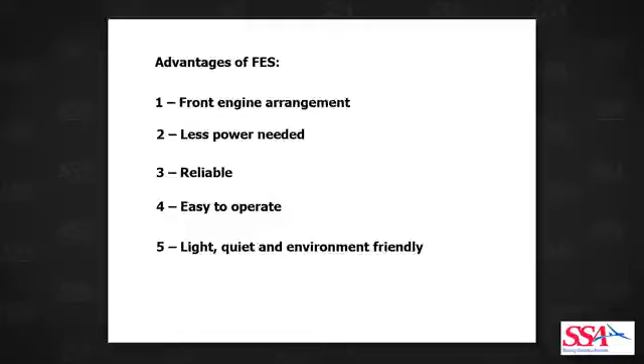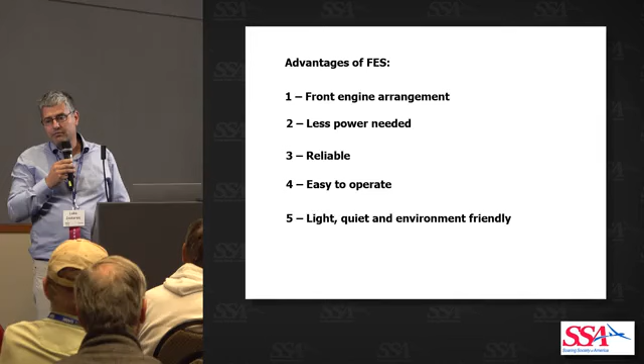Why did I do the FES development? From the beginning, I was always a pure glider pilot. I did not really want to have an engine on competitions because it was my feeling that it's not really an advantage. But with some time, when I got married and had my first daughter - before that my girlfriend, then my wife - she was not so eager to pick me up on the field, so she said figure out something, and eventually I did this front electric sustainer system.

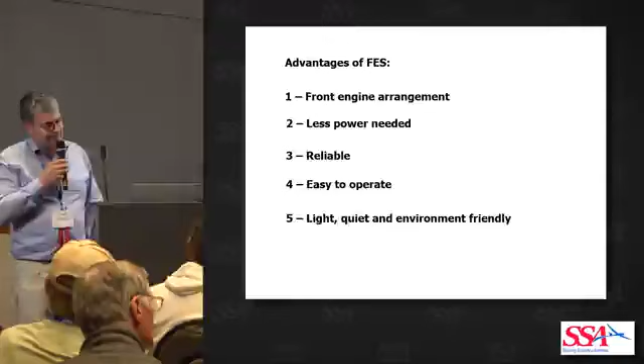The advantage is that at the time when I started, batteries had really very limited energy, and with the front electric system, even in powered flight, it's an aerodynamically clean configuration, so you need really small power for level flight - nearly half compared to the retractable system, as we also tested a few years ago when we did our retractable system.

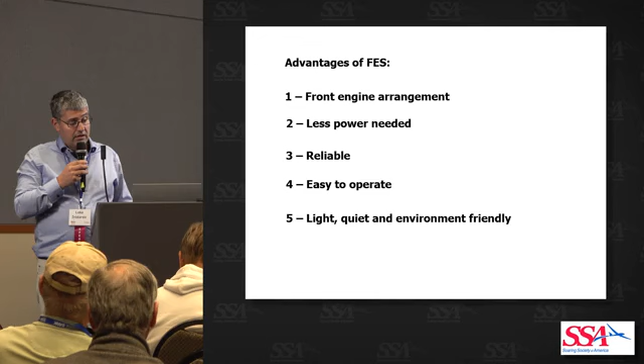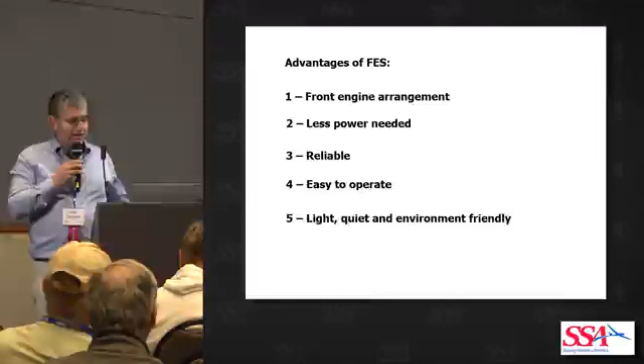Reliability in general, electric could be more reliable, and it is. Of course it's not always 100% bulletproof, but there are some different failures which can happen. Anyway, all around, it's proved quite reliable in the previous years.

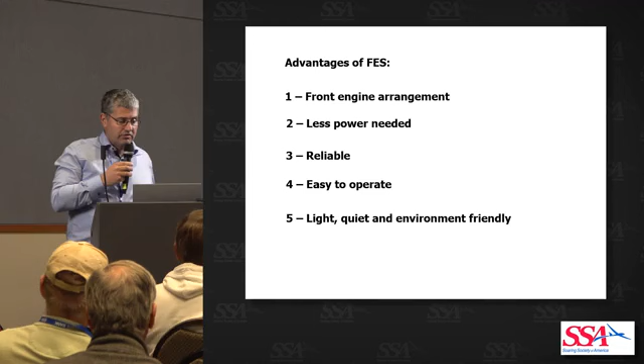It's quite easy to operate - you basically have one switch to power up the system, and then one throttle button, and on this throttle button there is also a brake and so on. With the FES system, we were able to make the system also quite light, and on lower power settings it's also quiet, and at the end it's also an environmentally friendly system.

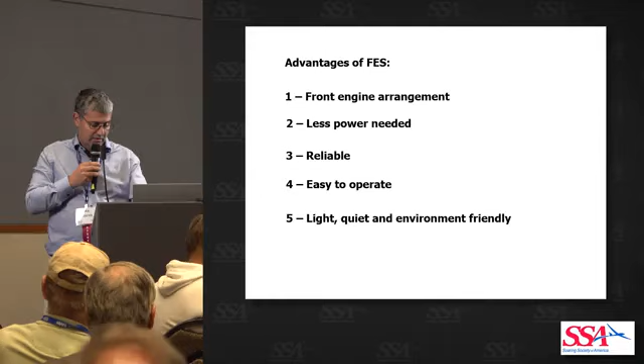For those who maybe don't know, we have basically this FES power switch and the instrument in the cockpit. Basically, when you are getting low, you can already power up the system with the power switch on.

Then you can start focusing on getting the thermal. And at the end, if you figure out okay, now I'm really too low to keep searching for a thermal, you simply rotate the throttle button, and immediately you get power, and you can climb away.

But for those who don't see very close, it's also possible to have this data of the FES - like current, power, RPM, temperatures - on the big screen of the LX9070 or 9000, or basically on the whole range of LXNAV flight computers via the FES bridge connection.

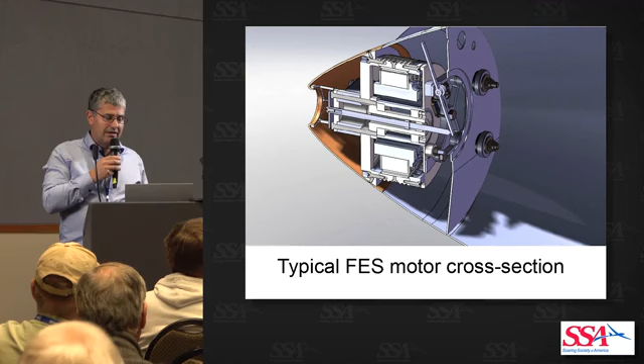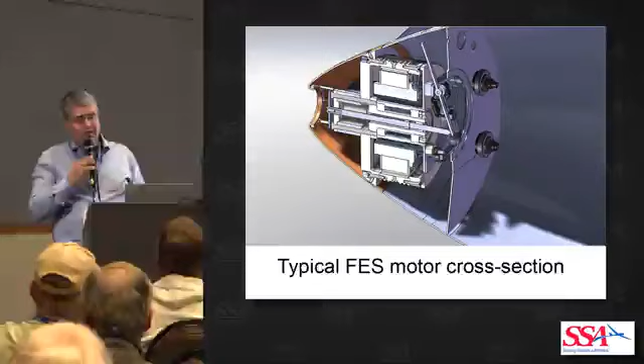Initially, we put it on the LAK 17A, which was at that time my personal glider, and there was already a wall in front, and the nose was basically round, so it was a good test bed for the system. On most newer gliders we adjusted the spinner shape according to the shape of the fuselage. For instance, on the Ventus or Discus we have a more eggy shape of the spinner, but we figured out a way how we can balance it so it runs very smoothly without vibrations.

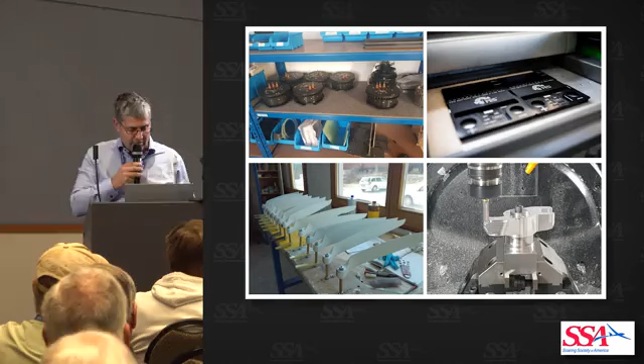We have mainly production in-house. We are quite well equipped with CNC machines, wire EDM, all kinds of equipment used in production. This is just some of the stock of our motors here. Then we have some laser engraving machines. On one of these photos you can see production of the prop holder on the 5-axis CNC machine. Then we have the propeller blades which we produce ourselves.

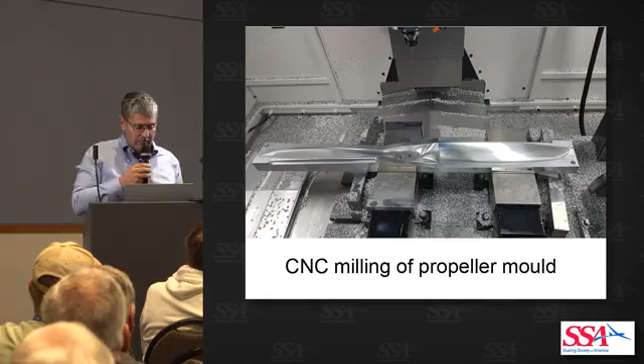And here is just before the final painting photo. So this is, for instance, production of the propeller mold for a retractable system.

This is our workshop when we do the installation of the glider. Usually we do mostly just the prototypes, some new types, in our workshop, and then we mostly teach workers of glider manufacturers so that eventually they do the installation by themselves.

Before Corona, I mean this COVID, we made more installations in our workshop, but then it was a bit difficult to transport the fuselages through Austria and so on due to all these limitations. So from that time on, mostly we just send a kit with all the parts to the manufacturers, and eventually they perform the installation by themselves.

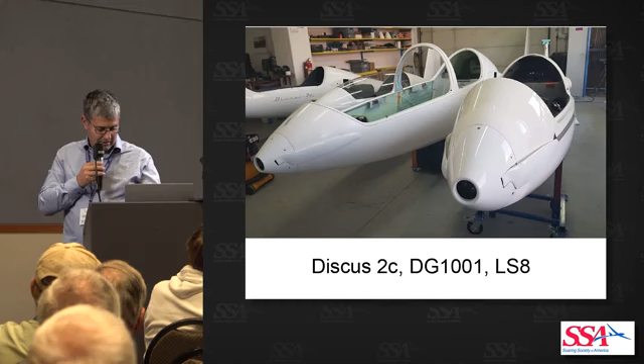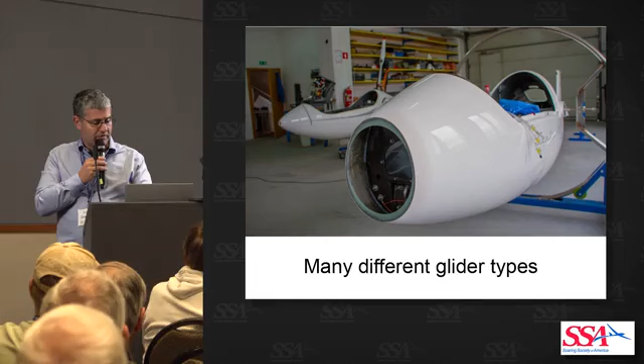In the meantime, we developed technical solutions and installations for more than 30 different types of gliders. Anyway, some of these gliders are more or less similar, but some are completely different.

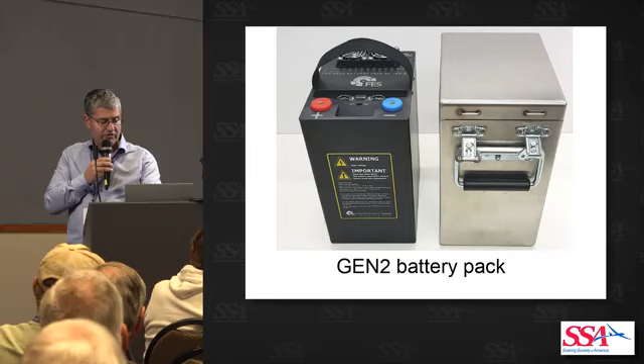These are our typical Generation 2 battery packs. We started with Generation 1, then most gliders were equipped with Gen 2, and we developed Gen 3, and the current version is Gen 4. For instance, you can see we have 4 sizes of Gen 4, 2 sizes for double-seaters and 2 sizes for single-seaters.

The idea is our packs are always in the fuselage, so that it's easily possible to remove them from the glider and charge at the club or at home. That was always kind of our philosophy, because of the way how we fly, we always have trailers.

Especially in Europe, mostly the trailers are in a long row on the airfield, and you don't have electricity there, and you don't drive the trailer home. You leave it on the airfield, so basically all you need to take out for the next flight is just the batteries. You recharge them and install them into the glider, and then you can go flying.

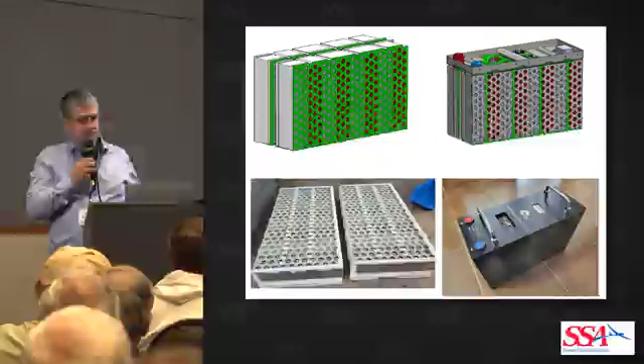Basically in single-seaters we have 20 cells in parallel, which creates one single block, and then we have 14 or 16 blocks per pack in single-seaters, so 20 cells. In double-seaters, we have 30 cells in parallel.

Here you can see in this picture, the gray and red are different blocks and so on. Then we put the bus bars on, and we do this bonding with ultrasound, these little fusible links, so that in case any of the cells would short circuit or something like this, it could disconnect itself. Basically this is similar technology, practically the same as Tesla cars have in their arrangements.

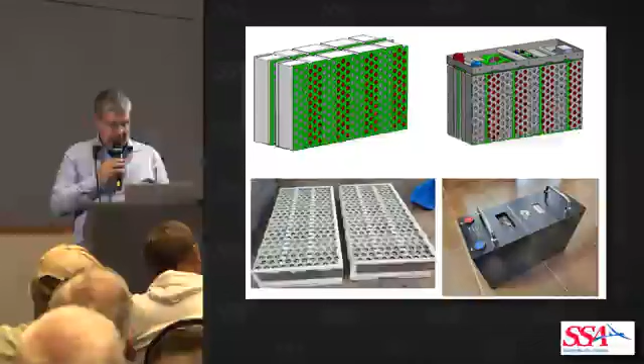We also managed to get rid of the strap for carrying the battery pack. With the Gen 4, we have two handles, which is really comfortable to handle. Lighter batteries for single seaters were okay with the strap, but with the bigger, heavier battery packs, we figured out that these handles are more convenient.

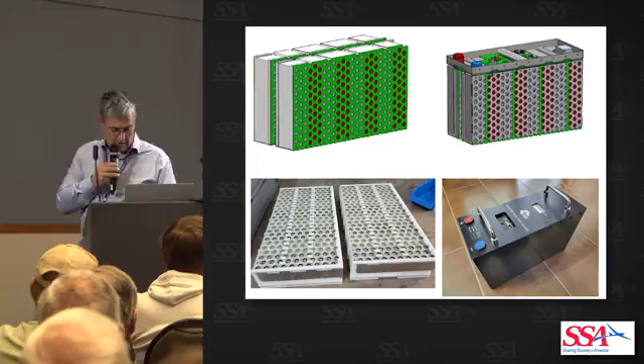So what is also important regarding the Gen 4 battery pack? This is how these cells usually look, and on the bottom you can see some cells after thermal runaway tests we did. The big safety advantage of our Gen 4 is that the cells we're using don't just have the standard safety vent on the plus side, on the top, like all 18650 cells have, but we also have a safety vent on the lower side.

During our thermal runaway tests for the ASTM certification, we figured out that when you trigger thermal runaway, the vent sometimes gets blocked, and then you can have a side rupture, which can lead to propagation to other cells.

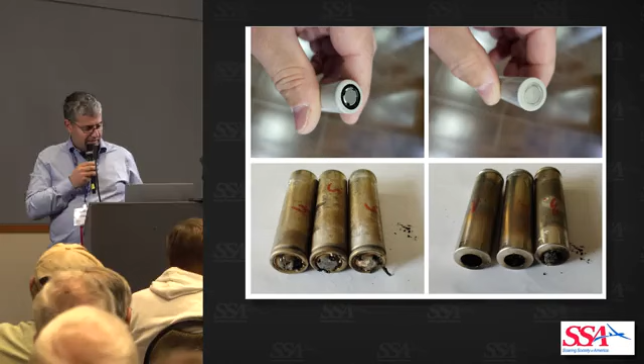Eventually we decided to put special cells inside which also have this safety vent on the minus, on the bottom side. With this we get reliability - if the plus side is blocked, it can open on the minus side. Here on the lower right picture you can see how such a cell looks when this bottom valve is opened. This is a really good way to prevent thermal runaway propagation to other cells and greatly increases the safety of the battery pack.

So this is, like, just sizes. As I said, we have small and M sizes for single seaters, and then large and extra large for double seaters. Most single seater sustainers use this small size.

On single seaters where we want self-launching capability, like heavier single seaters such as the LAK 17C with 18 meters, we developed this M version with a 16S configuration - slightly higher voltage, but it makes quite a difference in the RPM and load of the motor. We can go to about 30 kilowatts of power, whereas with the 14S we're usually around 20-22 kilowatts.

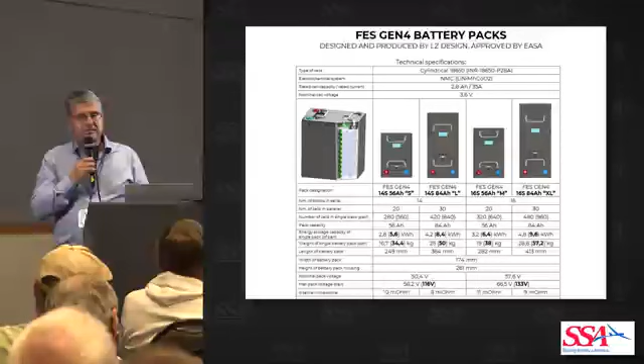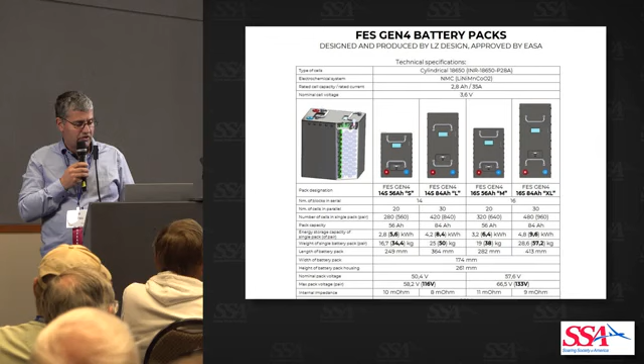With these big packs we managed to achieve the same range in the double seater as in the single seater. In the single seater we have about 30% higher range, higher capacity, which transfers into range, compared to the Gen 2 battery packs before.

For instance, this is typically how the arrangement of the battery packs looks. This is a photo from the Duo Discus, which is also in the hall downstairs. This Duo was a prototype, so we sold it this spring here to the US. There are two sizes of this L battery pack, which we name the 14S configuration.

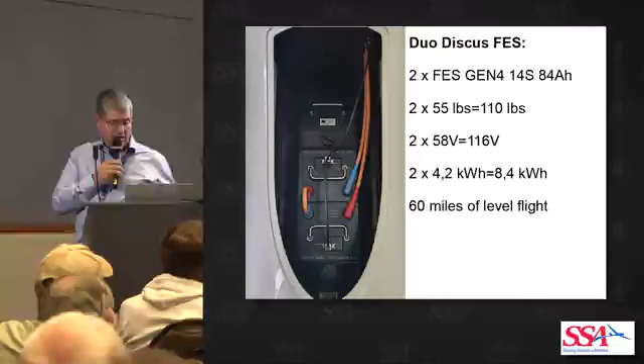84 ampere hours - each pack is about 55 pounds, the same weight as the battery pack on the Solo JS3. So one battery pack is about the same weight, but here we have a low voltage system.

Each pack only has 58 volts fully charged, and they're wired in serial, so we have 116 volts total voltage. Altogether on the Duo Discus we have about 8.4 kilowatt hours, which is suitable for about 60 miles of level flight - which in most cases is more than enough.

In the meantime, we managed to certify a few different types of gliders under EASA, because in Europe, if you don't have EASA certification, it's quite a headache.

We first applied with the LAK 17B in 2010, actually nearly already in 2009, and basically in 2014 we finally got certification - it needed 5 years after the first flight with FES installed on the LAK 17A. The main problem was that at EASA, the paperwork for how to do it legally simply wasn't available. Eventually they made special conditions for electric propulsion, which opened us a way to actually certify the system.

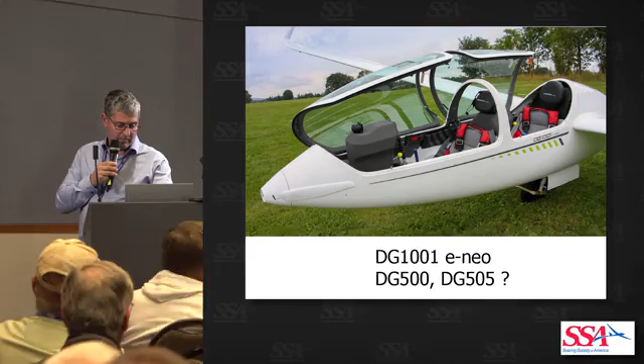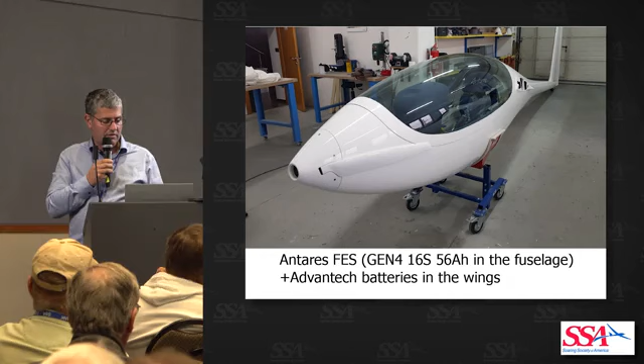Some of these Antareses had technical problems regarding the propulsion system. I also owned an Antares with US registration for the last 2 years, and I flew about 80 hours on this glider, which is a great glider. As long as everything works, it's great, but if something goes wrong, nobody really knows how to service it, and it's quite a challenge.

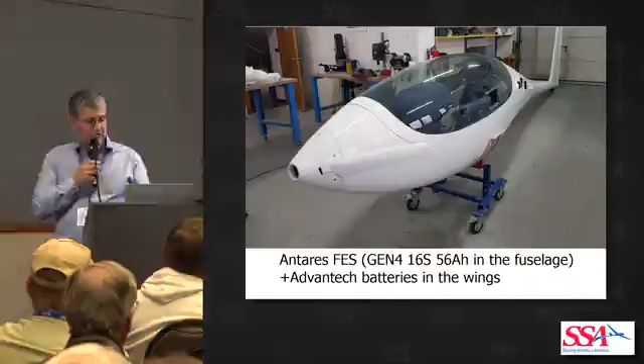So if somebody has a struggle, we can also convert it to FES if necessary. So are they still in business? Sorry? Antares, do they still? I think so, yeah. They are working. I mean, I think so. They have, I think, a 21 meter version. They are developing some new battery packs, but I mean, as far as I know, yes.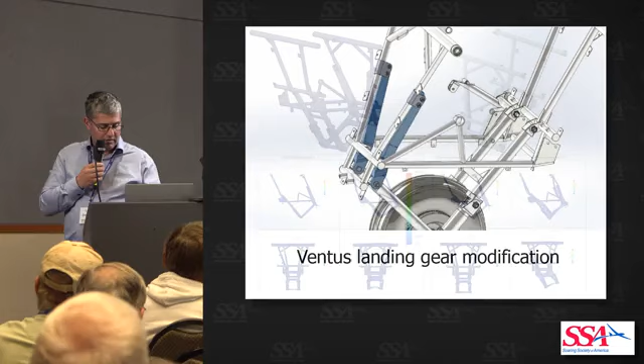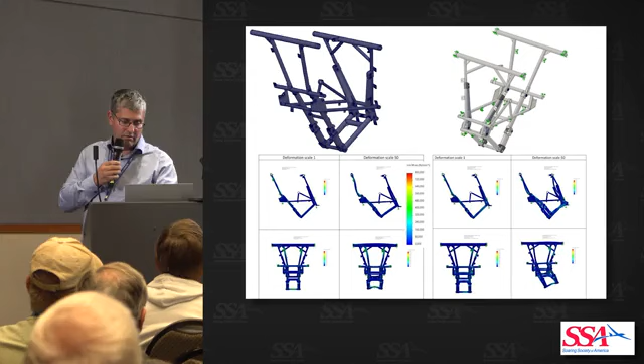In Europe, to achieve this, it's a lot of paperwork, and we had to do an FEM analysis of the structure and the loads, and eventually this was accepted by EASA. But till May, basically, I was grounded because I had no paperwork. So this is how we did the new parts for the landing gear. You see, this was the first time the glider was standing higher, the lower picture. This is so you can better understand the new attachment points for the landing gear, a bit lower, and how the new forks are attached. Before they were attached a little bit higher. So this is now my Ventus standing a bit higher.

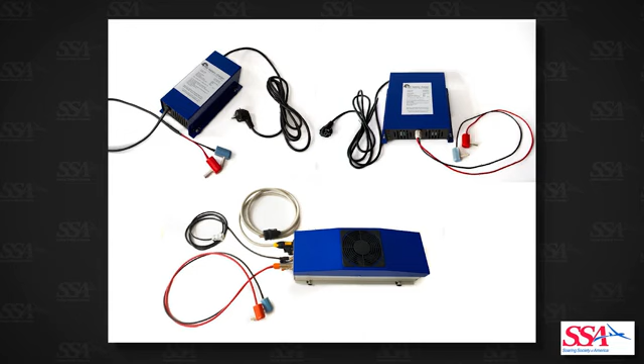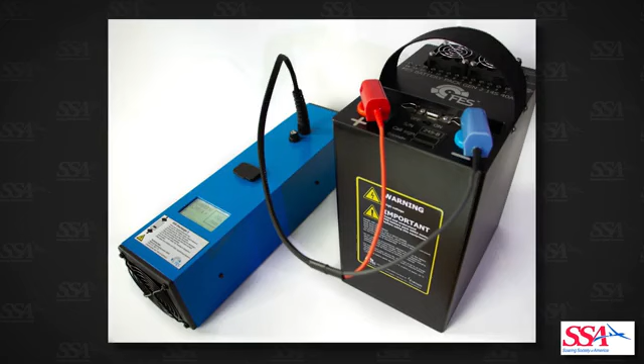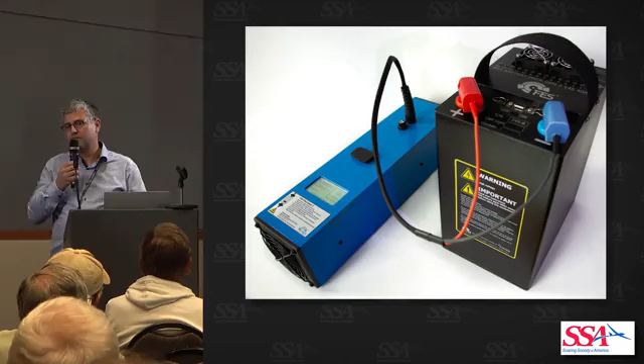Some older gliders were supplied with the older so-called discharging assistant. Now we have available for some time this so-called Discharger 2, which is a standalone device, so that you can discharge your battery packs quite quickly if you don't fly for the next few weeks or something. So this is available. We have some spare parts, like these data cables for charging that sometimes get damaged and owners ask about, and we have the phase bridge and all these little things.

What we also have in the shop is this so-called LZ fuselage tool, which is used for easy pulling and pushing of the fuselage into the trailer. It's mostly useful, for instance, on the Ventus M, when you have a steerable rudder and the fuselage is heavier, or for instance on the Arcus M. If you are alone, it's quite difficult at the end of the day to push the fuselage inside.

I had a similar device for the Antares, and then I saw that we can make something similar also for a Ventus, and in the end we made a standard version which is adjustable. The distance between the front and rear pins is adjustable. So basically we have a version now which fits all Schempp-Hirth gliders, and also HPH, not the Twin Shark, the single-seat Shark, and so on. So this is what I want to show you also.

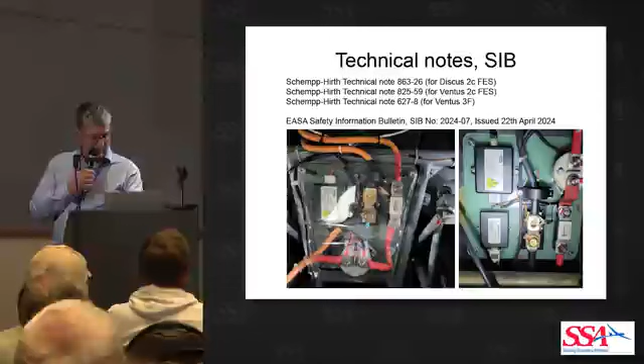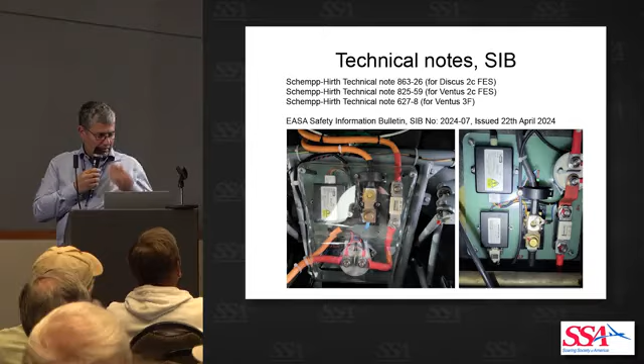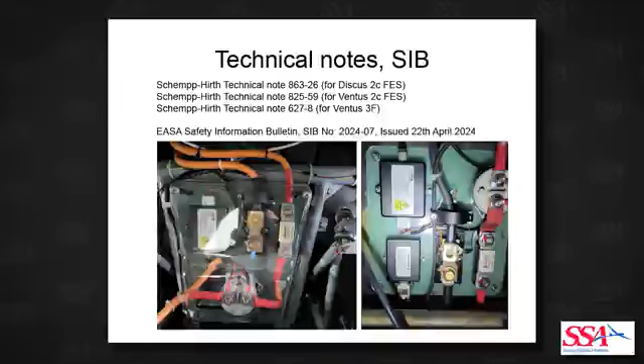As you are here, probably some of you own an FES glider. So in January there was a technical note for Schempp-Hirth gliders regarding these brass bolts on the shunt. There was no AD, so no airworthiness directive issued by EASA. They just issued a safety information bulletin, so basically it's good to check these brass bolts.

What happened in this picture in the middle actually first happened on my glider. I had nice wave flights at high altitude, minus 30 degrees Celsius, and then on the ground it was a bit warmer and so on. Then I put the glider in the workshop, and simply in front of me the head of the bolt fell from the shunt. So at that time I changed this, and it was very weird because before, with 300 FES gliders, this was never a problem.

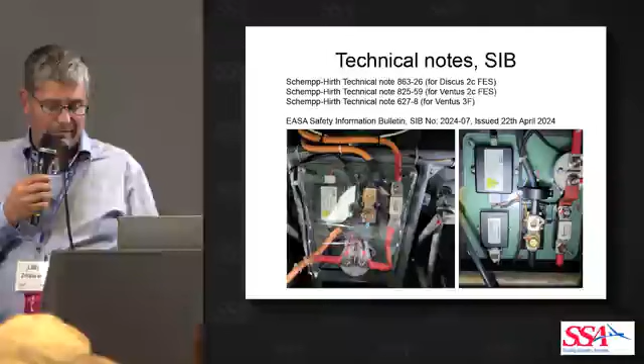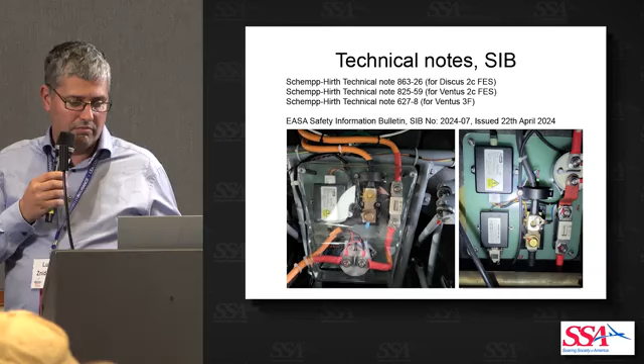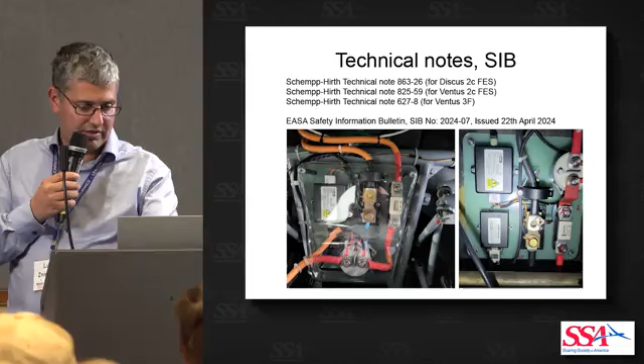But at some point we got these shunts with the shorter bolts, and it seems that these shorter bolts are really not proper material, and from time to time they fail, especially maybe when too high a torque was used while tightening, even though we had defined the torque. So anyway, this was just for the Schempp-Hirth gliders, but I would suggest changing these bolts on all existing FES gliders. Even though for 10 years there was no problem, it's better to change. It's a very little amount of work, but it can increase the safety a lot.

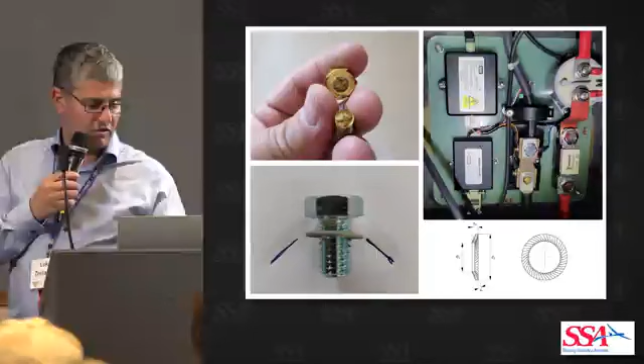So you see, this is the bolt. Basically what we are putting now as a replacement is a stainless steel bolt with the Schnorr spacer below. So just make sure that this Schnorr spacer is oriented properly when you are assembling, as it's visible on the lower left picture.

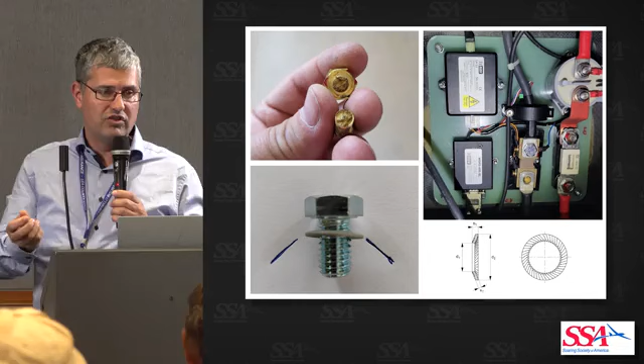Just to explain why I decided that this should be changed on all the gliders: just recently I went to check Tony Smodler's JS1 in Houston, and the problem was really that one of these bolts was broken. So I changed it with a new one, but then when I wanted to change the lower one, I just touched it and it stayed in my hand. So it really needs to be changed on all gliders. This is how this shunt is usually positioned on the LAK gliders, and this is how it's already replaced.

And another thing: when I was checking this on one glider, I saw on the MOP sensor, the Hall sensor, that of these little bolts on the hinge, one part was missing. So please check if both parts of the hinge are there, and try if it's holding well. If you can unscrew it, there should be Loctite. I told the Helix guys that they should put Loctite there, and it seems that recently they started putting it, but when you are checking these bolts, it's good to check this too.